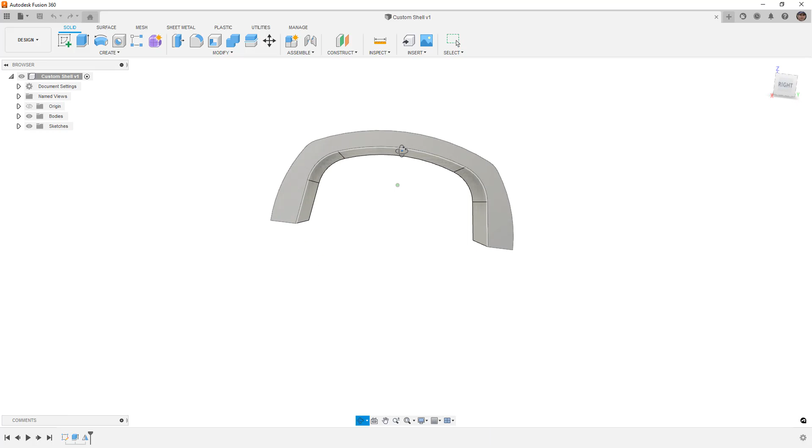This is an interesting topic because oftentimes when you 3D print a part like this, the infill and whatever slicer you're using for 3D printing just goes ahead and handles all the material removal and the lattice structure that gets created.

However, there are some cases where you might want to include custom features. So what we're going to do is talk about how we can do that in Fusion 360 with a couple of workarounds and tips.

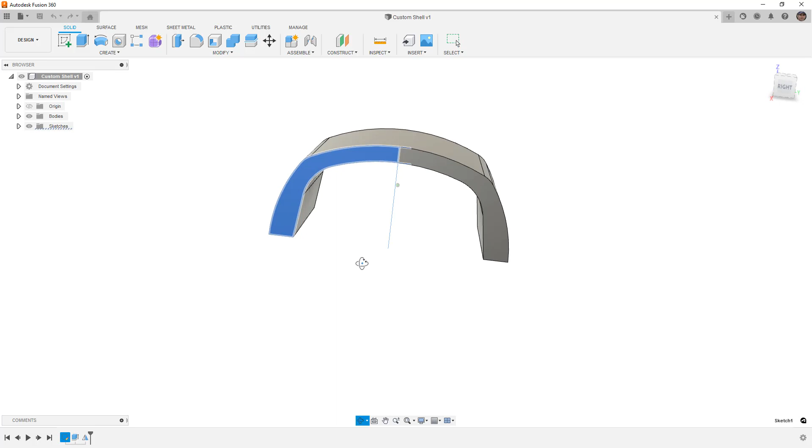Now, the first thing that I'm going to do is go into my bodies folder. I'm going to take this body and call it base, just rename it, and I want to create a copy of it. You can do this by Control C, Control V if you're on a PC.

You can right click and do copy, and then I'm simply going to right click at the top level and paste it. Now, when you're dealing with bodies and not components, you can copy and paste all day long. They do not maintain a relationship with each other.

When you copy components, what you're going to end up having is either a paste or a paste new. The paste new will break the link, or paste will actually keep a link between each component.

So now that we have a copy and the original, I'm going to hide the original. The main reason I wanted to do this is because I'm going to use shell, and I'm also going to use some additional techniques so we can build out the inside of this body.

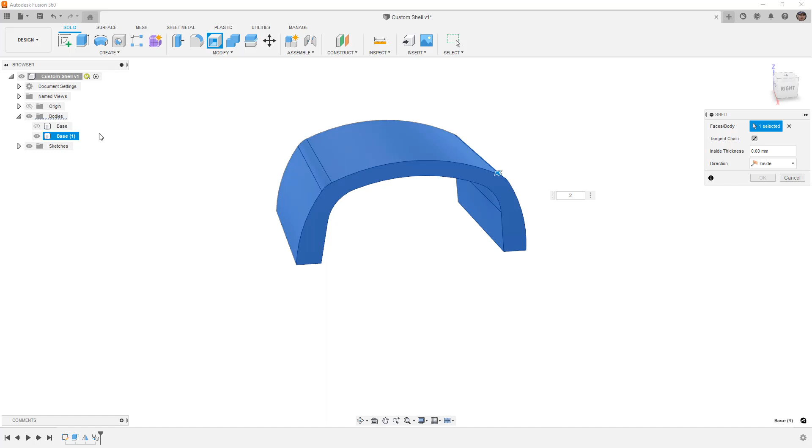The first thing we're going to do is select shell, but instead of selecting an individual face like you might normally do, I'm going to select the entire base and determine what that shell thickness is going to be. I'm going to do 2 millimeters and say OK.

Now, on the surface, it doesn't really look like anything happened, but if we take a look at a section analysis and just drag this through the body, you can see we've got a thin-walled part. This thin-walled part is basically the original part, just hollowed out with the inside completely removed.

Now, if you're printing this with a powder bed solution or some other method, this is really not going to work because you're going to end up with powder inside all these areas. If you're printing it on an FDM or FFF style desktop extrusion printer, then this will probably be fine.

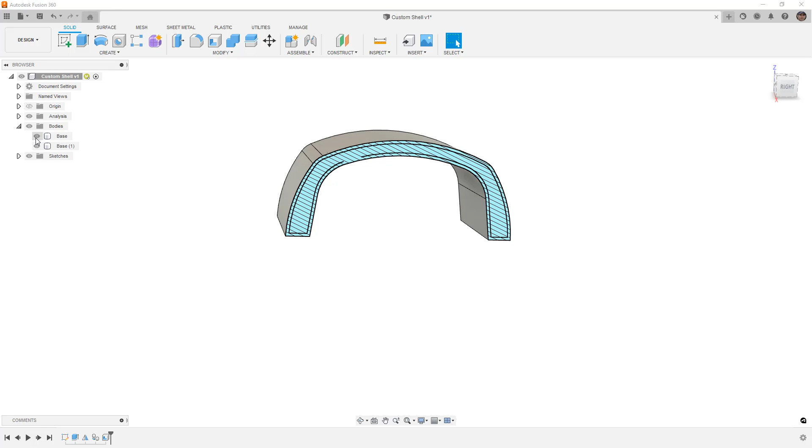It's going to put some supports and infill in there anyways, because it's not going to be able to print these horizontal sections. If this was laying in this orientation, it could print the walls just fine, but once it gets to the top, it's going to be open and it will still have supports in there.

That's not really part of what we're doing here, but what we want to talk about is ways in which we can create this inside geometry, and there's a couple different ways that we can do this.

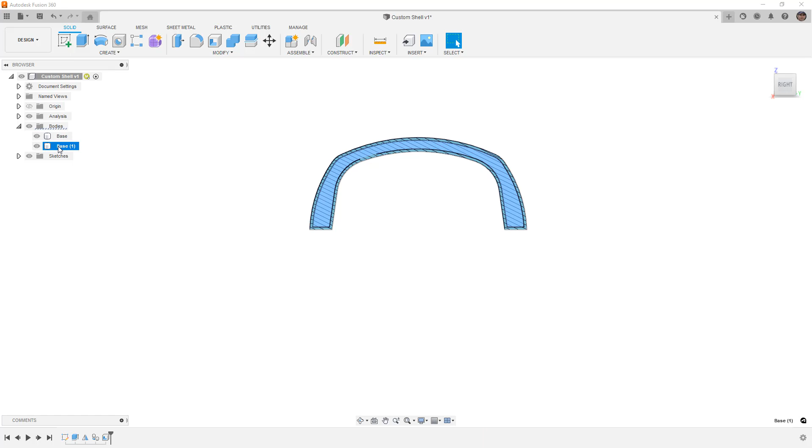One way we can do this is by taking a look at the original copy and subtracting out the shelled version of it. That's going to leave us with just the inside. That's probably the easiest method, but sometimes that doesn't work because you might have complex features.

You might actually need to go into your surface tools and create an offset. Now, when you do an offset, and this is not the method we're going to use, you can select these inside faces, and if they have tangency, it'll be pretty easy, pretty straightforward.

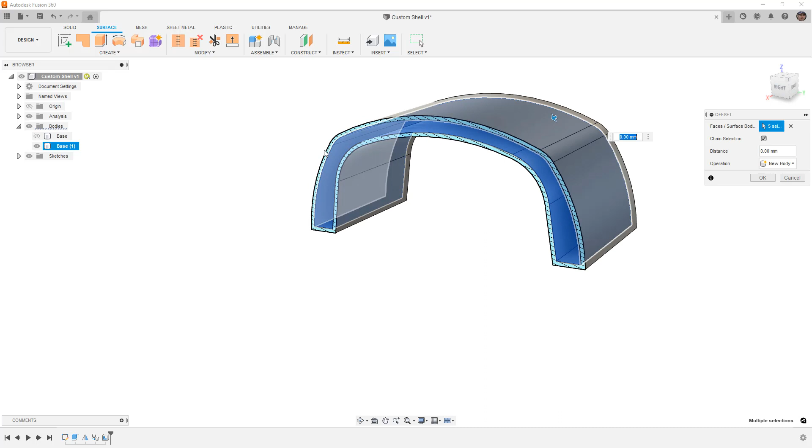And you can select the end as well. We're not going to be able to select the other end, obviously, because of the section analysis, but you can bring it back. Hold down the left mouse button, find that inside face, and say OK. When we do that, we end up with a completely closed volume here, and it's one surface body, but it doesn't really recognize it as a solid because we didn't stitch all these together.

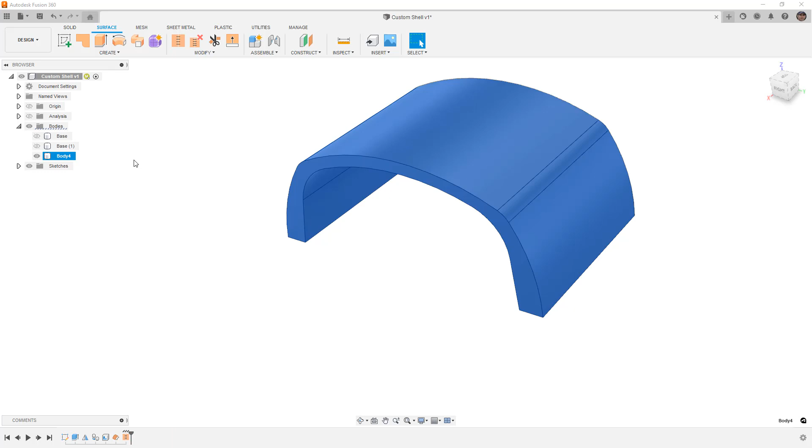Now you can use the stitch tool and try to stitch them together and turn them into a solid. Sometimes you can use thicken and that'll work as well. So that's one way we can turn that inside volume into a solid body. Now you can see what we have is this sort of inside section, a little bit smaller, and that is the section we're going to build out our custom features.

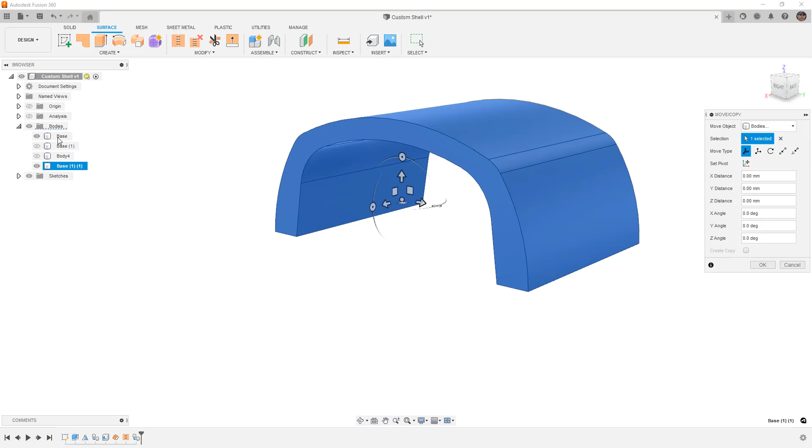Let's talk about the other way we can do this as well, using combine. This is going to require us to make another copy of that original, so again Control C and Control V. It's going to be kind of hard to keep these in mind, but now what we have is the original and the shelled out version.

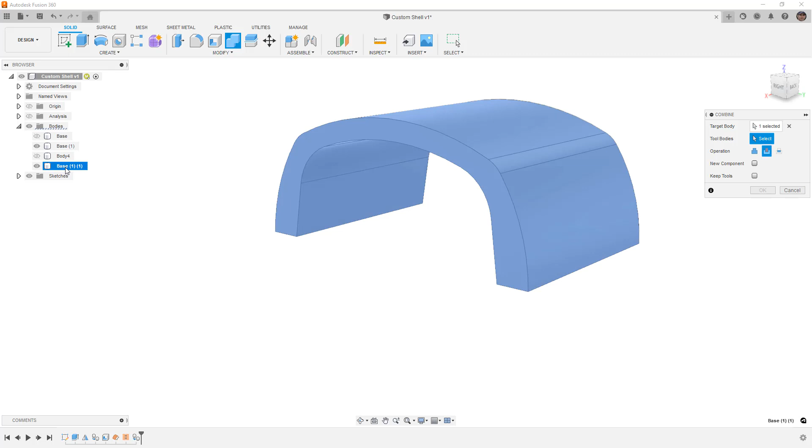And what we're going to do is use combine to subtract one from the other. Now this is something we need to think about, because which one do we want to subtract? We want to get rid of, we want to use the shelled portion, which was this base here, to subtract the outside. So the copy is going to be our tool, and this base piece—I'm sorry, I said that backwards.

The copy is going to be our target. The outside full solid piece is going to be our target, and the part we're going to use to cut away is the shelled version. We'll say okay. So again, this leaves us with this inside piece. It should be exactly like the surface version, exactly the same thing.

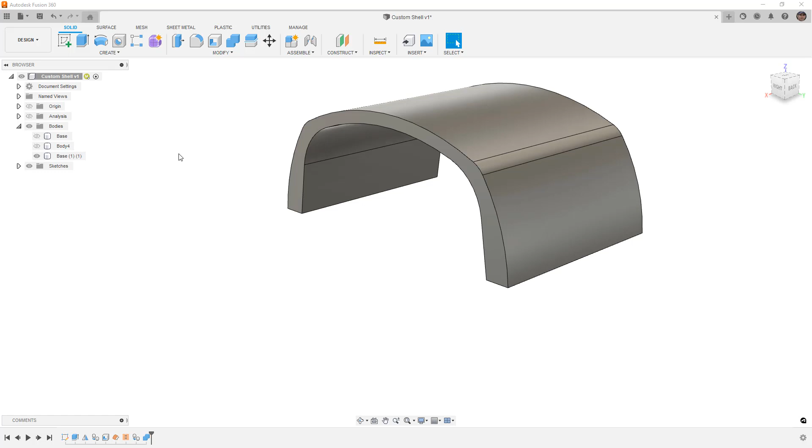Now, why did I show both of these methods, keeping in mind these are not the only two methods? I showed these because sometimes you have to find a workaround. There are some cases where the surface method is going to be best, especially if you need to make custom features around intricate details. Sometimes the shelled method works just fine, other times it doesn't, simply because of things like a fillet radius being too tight and the faces disappear and you have problems. So one or the other should work just fine.

But now here comes the trick of all of this. What we need to do is create the negative space. The part that we actually want is going to be the space that we're removing right now. We have to think in negatives, which is a little tricky to do.

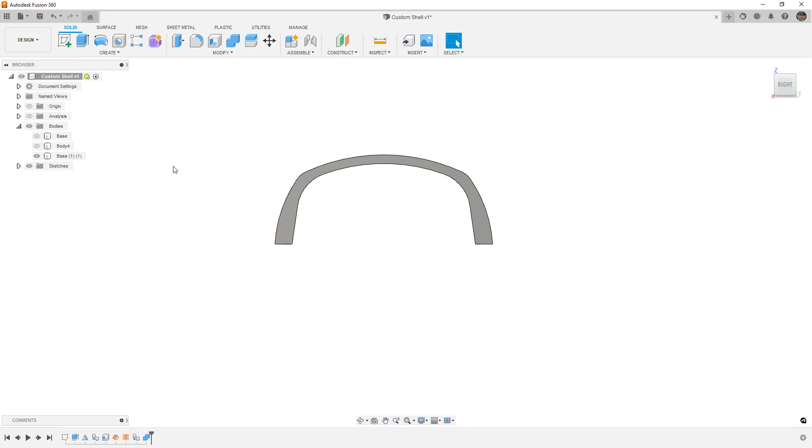So if we take a look at this, the first thing I'm going to do is bring back my base, but I'm going to right click and go to opacity control and just set it at 30% so we can see through it. Now you can see we've got our outside and this sort of inside shelled section. If we hide the shelled section, you can see this part is still solid.

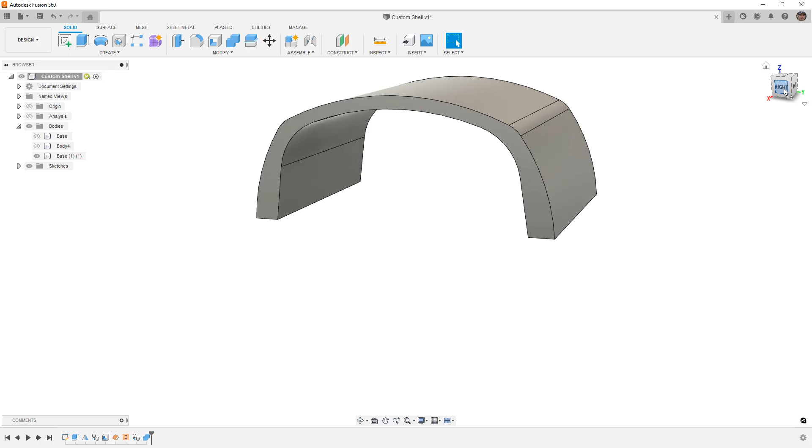And what we're going to be doing is turning this inside solid volume into the ribs and sections we want. So I'm going to create a sketch, pick the right plane, and start with a center point rectangle at the origin. It doesn't really need to be this big, and I'm going to sort of exaggerate what we're doing here.

So I'm going to add a dimension, D, 15 millimeters. The height doesn't really matter in this case—I'll just make it 150 so it goes all the way through. The next thing I'm going to do is create some additional rectangles, and this time I'm going to use 3-point because I want to create some ribs in the corners here.

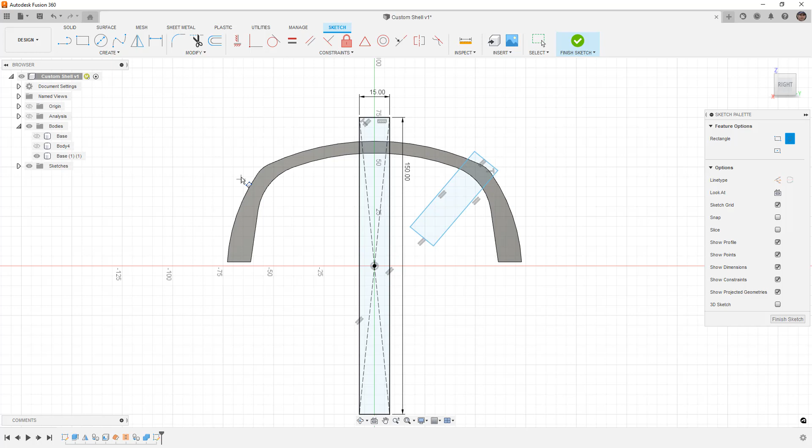I'm going to do the same thing over here. I'm not going to spend a ton of time making sure that all of this stuff is dimensioned because you should be able to get the idea from what we're doing. But I am going to add an angle. Here I'm going to say 40 degrees.

This one automatically came in perpendicular. You can see there's a little perpendicular constraint in there, but we can still move around this rectangle however we want. However, I do want to make sure that they are the same on both sides, so I'm just going to click on this dimension to link them together. And they're the same width, they're the same size. You could worry about the orientation, but again, I'm not going to spend too much time on that.

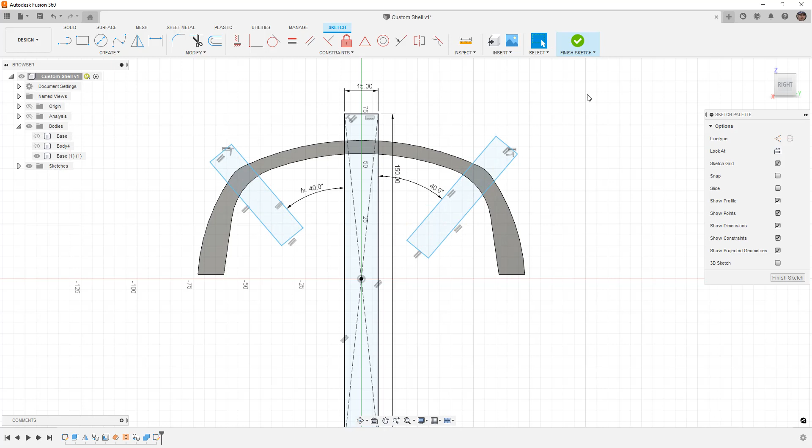Okay, so now that we have these, I'm going to hit E to extrude, and I'm going to take these all the way through, cutting through that body. And now what we're left with are these couple of different pieces.

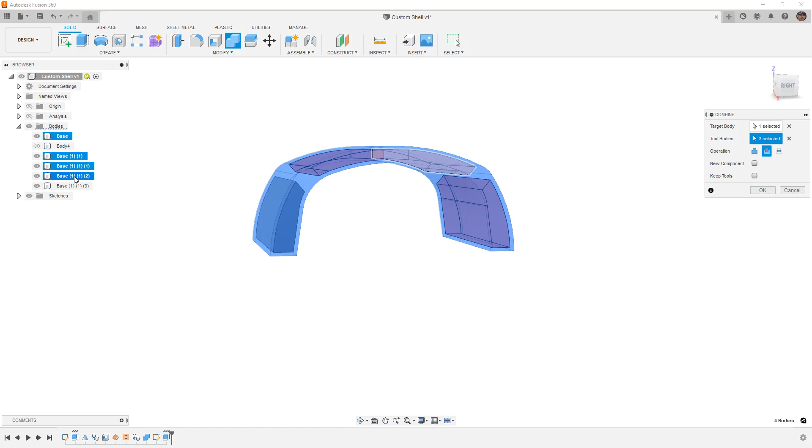Now what we want to do is we want to go back to the original. We're going to use combine, again we're going to use cut. That original is going to be the target, and the tool bodies are going to be all these extra little pieces that we created. When we say okay, what we're left with is the shelled section that has these internal ribs.

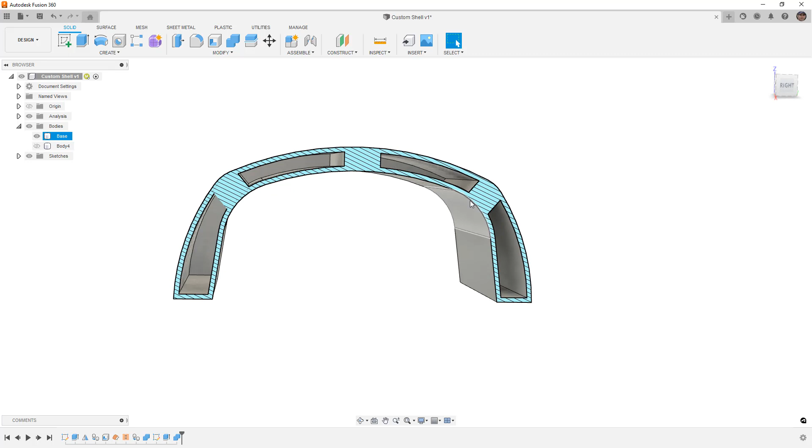Now, obviously this is a simplified example. What I mean is that you could spend a lot of time making the outside shape much more complex. You could also spend a lot of time having internal details, internal features. Now, the reason I added these at this stage is because the outside shape was relatively easy to deal with.

For example, if you were doing an RC airplane or some sort of fuselage that you had to attach together, more than likely you would have attachment details or features. Now, I would add these after the fact.

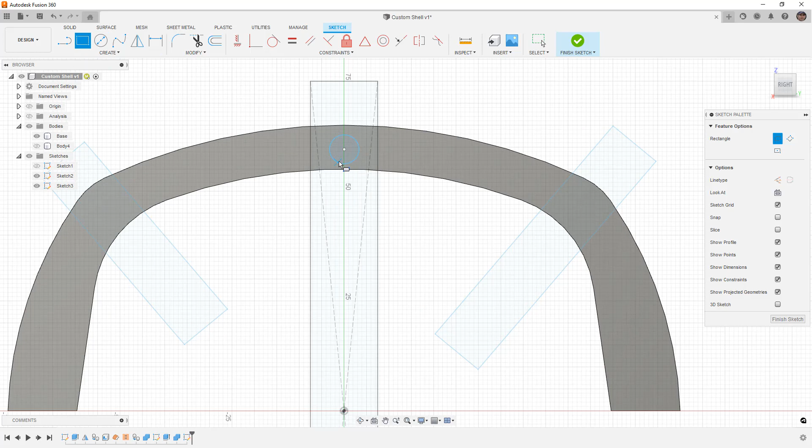So I'm going to go ahead and put a circle in here, and I'm going to put a small rectangle in here. And what I'm going to do is make sure that rectangle intersects over there. I'm going to make sure that the center of my circle is vertical with the origin. And I'm just going to place this in here as just a sort of generic key feature.

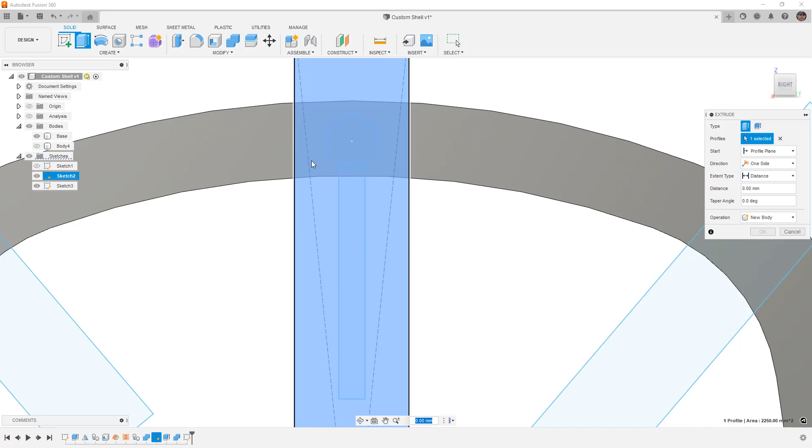I'm going to hit E to extrude. I'm going to select all the regions that we want to extrude. Let's go ahead and rotate this a little bit. So we want to take this little keyhole feature, and we can take it as deep as we want into this part. This part is just extruded, so I could go all the way through.

But now this means I could have these little key parts that maybe I 3D print that allow me to slide the two halves together. Now, there are always things we need to think about when 3D printing, things like any support material that's going to be required, whether or not we've got the resolution to print stuff like this.

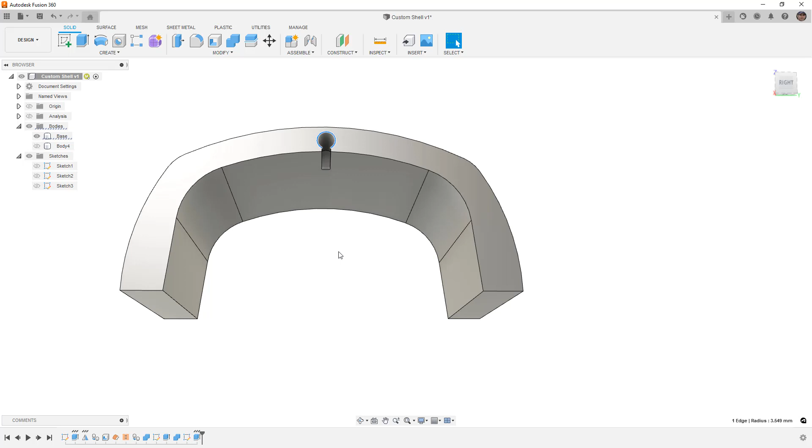But these key features, if they go all the way through the part, so for example if I just take this down, or if I say distance through all, that's going to be really easy for us to print. So if this is us looking down on the part, then I don't need any additional support material to make that work. It might be a potentially weak section up here, so you need to think about things like the size of these features.

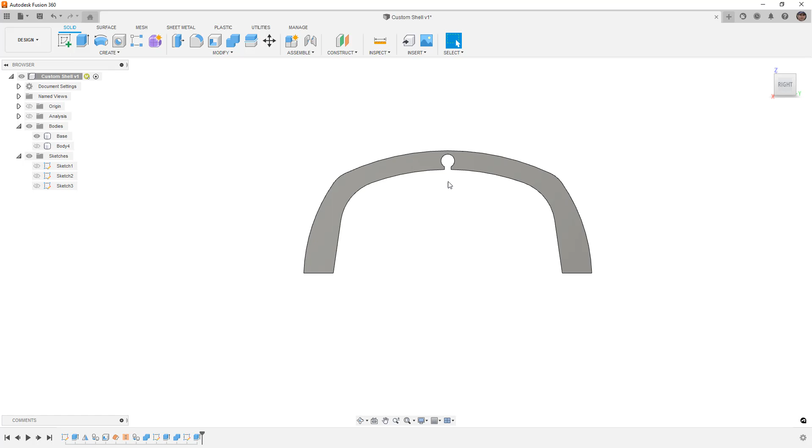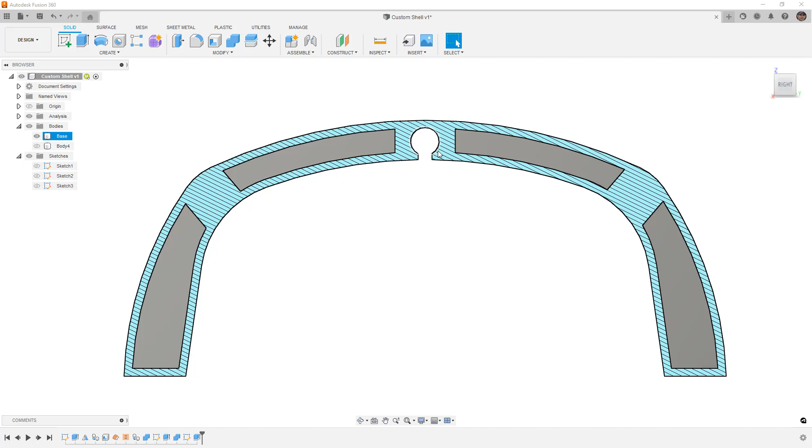But when we go back to our section analysis, you can see that's right directly in the center of that rib that we made. So we have a shelled part that's lightweight. When we 3D print this, it's going to automatically put some sort of lattice structure or support structure in there to support these horizontal sections when they're getting printed. And these keyhole type features can be a great way to attach a bunch of different parts together.